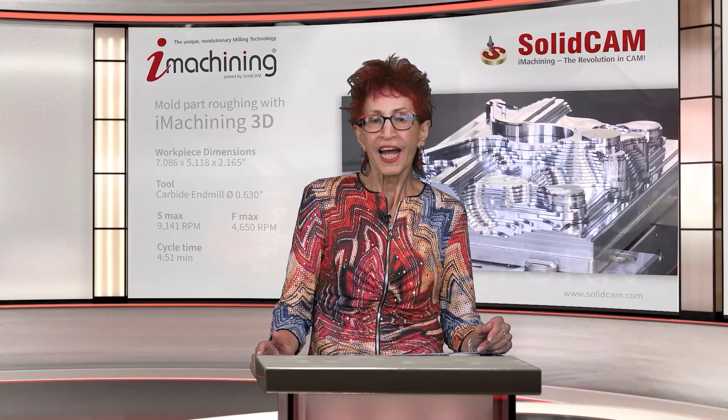Emil, and hi everyone. I can tell you I'm very excited about our 2021 Q4 Summit on October 7, considering that the previous summit in April was very successful with thousands of attendees worldwide. I think I'm beginning to like this virtual world, Emil. People sit in the comfort of their home or office and watch fascinating presentations.

So tell me, Emil, the April summit covered so many topics. What are you going to talk about in this summit? I will tell you the agenda soon. First, I would like to talk shortly about a few subjects. Let's see again the SolidCAM product. It's a complete integrated CAM solution inside SolidWorks and obviously also inside Inventor.

Looking at the center of the circle, we see our 2.5-axis milling module that has been developing for the last 30 years. It's a very powerful module, augmented by our automatic feature recognition and machining module. If you see on the left, you will see our 3D milling modules. First, HSR for roughing, HSM for finishing, and HSS for surface finishing. And we have added recently also our Turbo HSM and Turbo HSR.

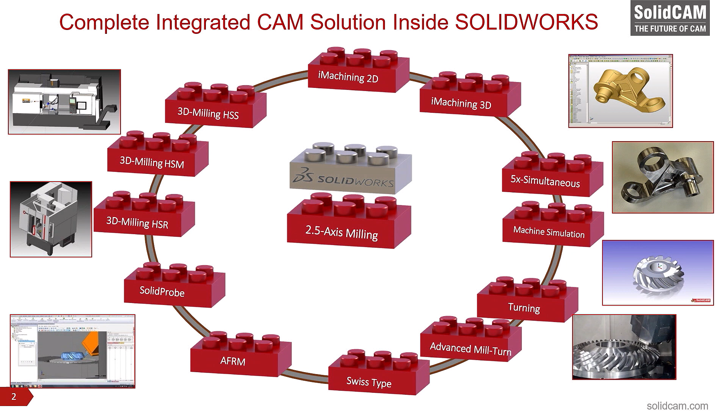Looking at the top, you see our very important two modules, iMachining 2D for prismatic parts, and iMachining 3D for complex surfaces and also for prismatic parts. To the right, you will see our 5-axis simultaneous module, very high functionality. Then we have our turning, our advanced mill turn, and our Swiss type. The last two are becoming our trademark since we are much better than any other product in the world today. And we have also the SolidProbe module for controlling the probes.

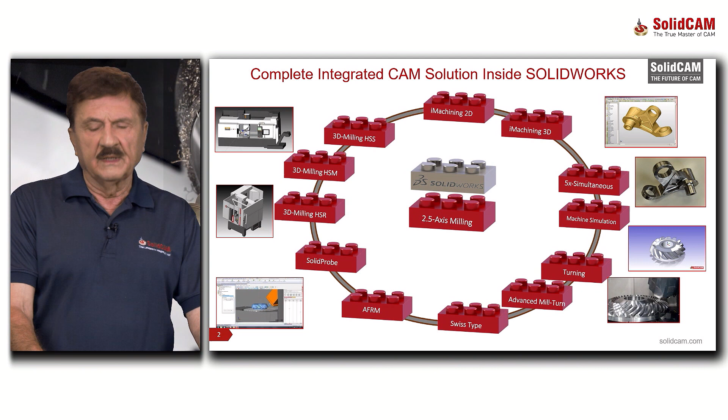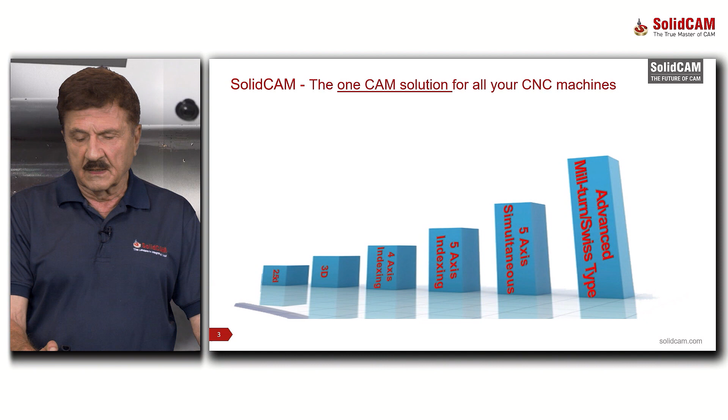So SolidCAM is the one CAM solution for all your CNC machines. It covers 2.5D, 3D, 4-axis indexing, 5-axis indexing, simultaneous 5-axis, and obviously also advanced mill turn and Swiss. As you see, as you go to more and more complex CNC machines, we provide the highest customer value.

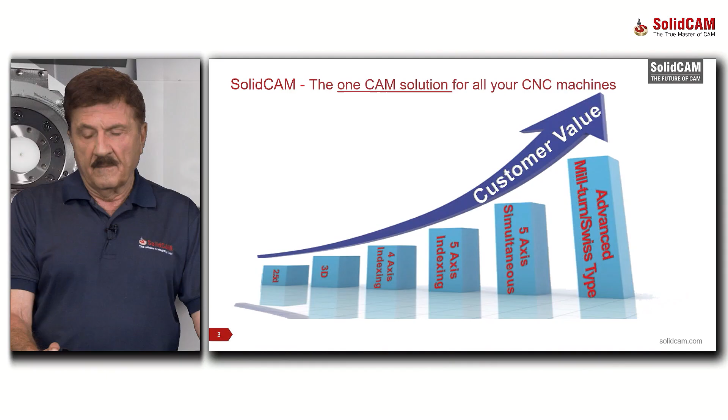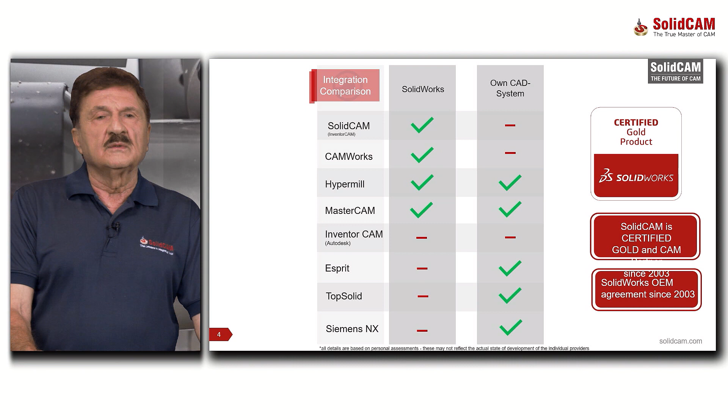So our integration in SolidWorks actually is very important because SolidWorks now is the leading CAD product in the world. And in the machining world, a lot of machine shops already have SolidWorks. They use it for designing jigs and fixtures and some model changes. So we are seamlessly integrated in SolidWorks. So if somebody works with SolidWorks, they can easily learn SolidCAM.

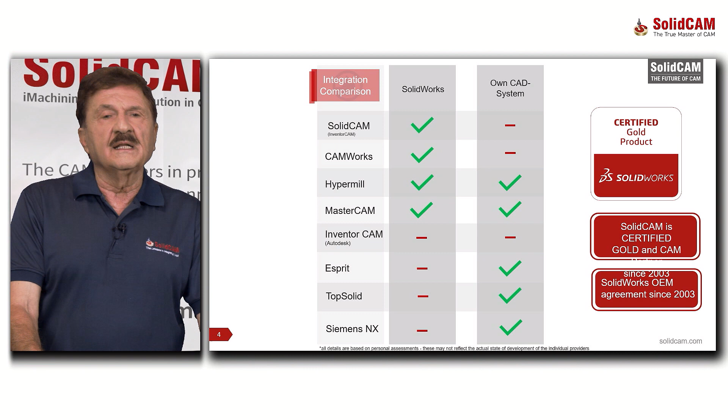There are only two products that are seamlessly integrated in SolidWorks, and they don't have their own CAD. To work with SolidCAM, you need to have either SolidWorks already, or you buy from us the bundle including SolidWorks and SolidCAM. If we look at the third and fourth row, we have Hypermill and Mastercam. These two products, they say they have both: a version with own CAD system and a version integrated in SolidWorks.

But actually, the problem is, since they put most of their R&D emphasis on developing the version with their own CAD system, the SolidWorks integration gets neglected, and in the end has less functionality than the full version with their own CAD, and is also less stable.

So even though Mastercam salespeople sometimes show the simultaneous in SolidWorks, they then concentrate only on showing the version with their own CAD system. And when they sell the product, they convince the customer to work with the version with their own CAD system. Really, we have yet to find any customer happy with Mastercam integration in SolidWorks.

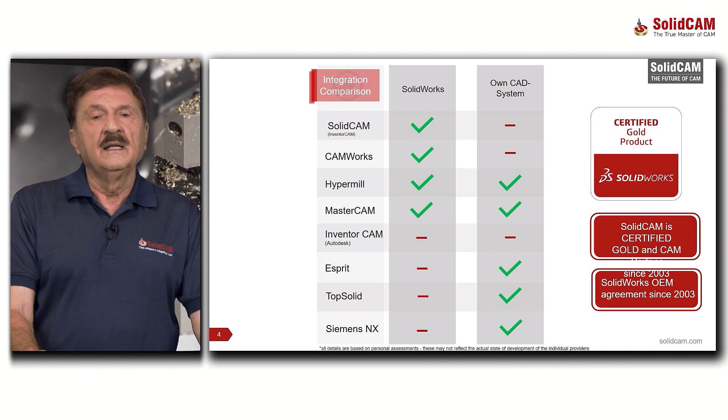If you look at the last three rows, these are the products Esprit, TopSolid, and Siemens NX CAM. And these three products have their own CAD system with no relation to SolidWorks. Now let's look at the SolidCAM company profile. We have 37 years of expertise in CAM development and application with 230 staff.

We have 2 offices in our headquarters. Our European headquarters in Germany has 7 offices, and we have a great international support team in Serbia to support all our resellers worldwide. We have affiliated companies, SolidCAM UK, SolidCAM France, SolidCAM Czech Republic, and SolidCAM Italy. We have a branch in the US, an important branch.

In Asia Pacific, we have SolidCAM India, SolidCAM Japan, SolidCAM China, and affiliated companies, SolidCAM Australia, New Zealand, SolidCAM Singapore, and SolidCAM Taiwan. In addition to all these branches and affiliates, we have a worldwide CAM distributor network of 65 major resellers. So today, worldwide, we have 22,000 industrial seats of SolidCAM and 55,000 educational seats.

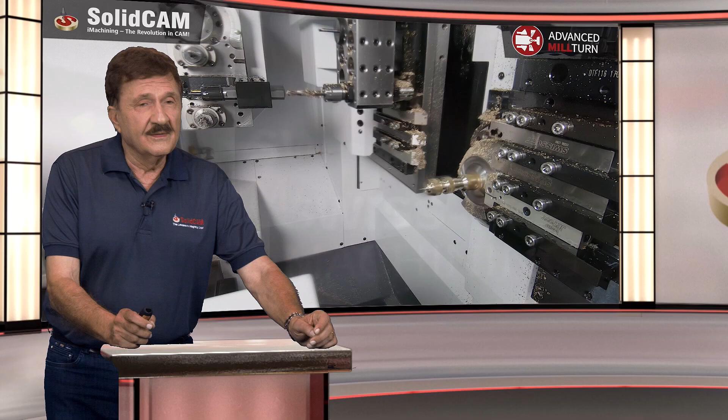Well, the truth is, everything is unique about iMachining. First of all, we are the only technology of its type that has both iMachining 2D for prismatic parts and iMachining 3D for complex surface parts and also for prismatic parts.

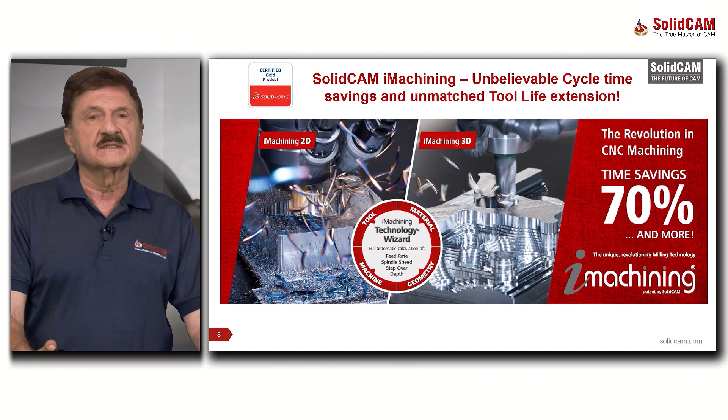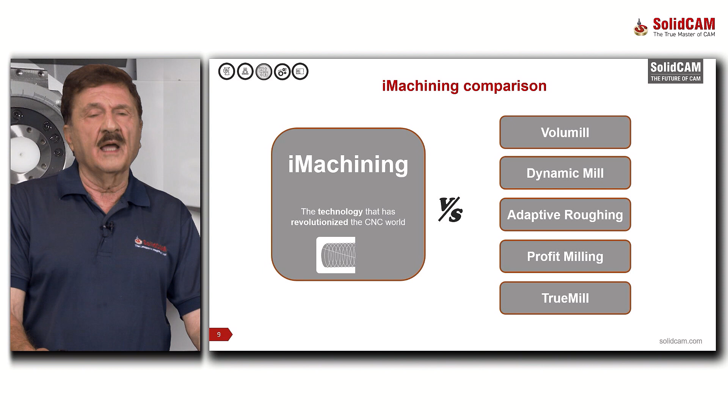So now, let's really look at a close comparison of iMachining against its competitors. You see on the right, first, VoluMill. This is a module that is integrated in many CAM systems today, like in Hypermill, Cimatron, GibbsCAM, and many others. We have Dynamic Mill of Mastercam. We have Adaptive Roughing of NX CAM. We have ProfitMilling of Esprit and TrueMill of SurfCAM.

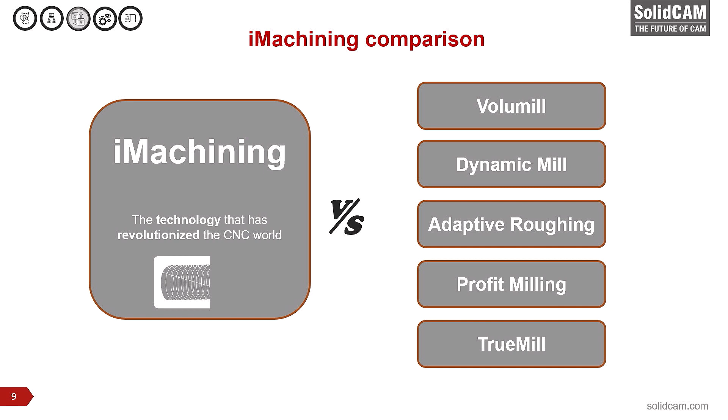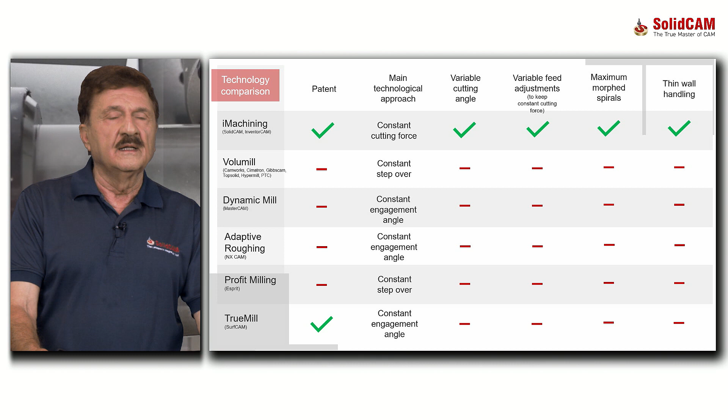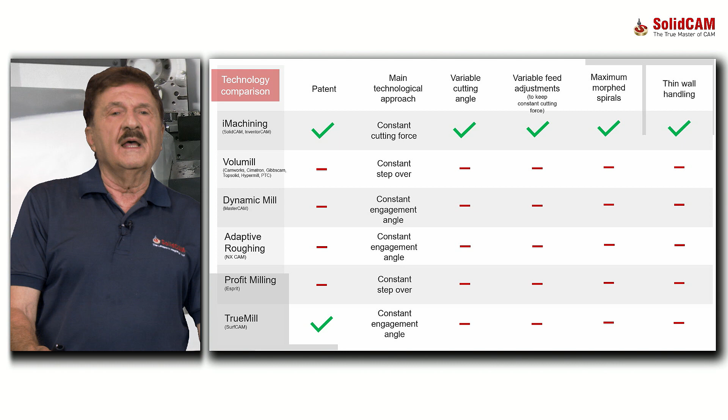OK, let's look now deeply and try to see why iMachining is so unique. First of all, you see in the first column regarding patents, we have several patents for iMachining 2D and 3D. No other one has patents except TrueMill of SurfCAM, and you know what's the situation of SurfCAM today. Next, we go to our main technological approach. This is a major, major advantage of iMachining.

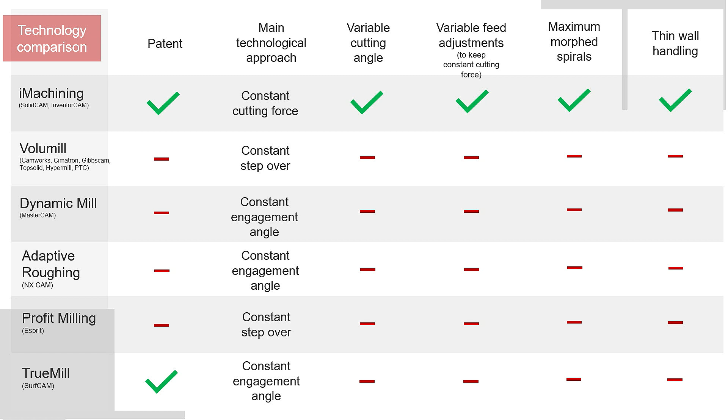We guarantee constant cutting force on the tool all along the tool path and also constant spindle load. Actually, if you look at the spindle load of the CNC machine while cutting with iMachining, you'll always see a constant load of about 17, 18% on the spindle. Our competitors have a much inferior technological approach, either constant step over or constant engagement angle.

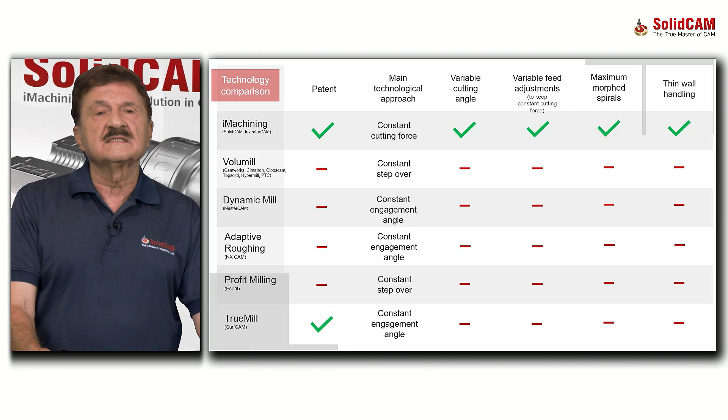Next, we see that iMachining is the only one that has variable cutting angle all along the tool path. All the competitors don't have it. Also, iMachining has variable feed adjustment all along the tool path to maintain the constant force on the cutting tool.

Next, the column before the last: morphed spirals are the most optimal tool path in terms of speed. And iMachining has maximum morphed spirals. The other technologies have some morphed spirals, but iMachining is the only one with maximum morphed spirals and some trochoidal tool path.

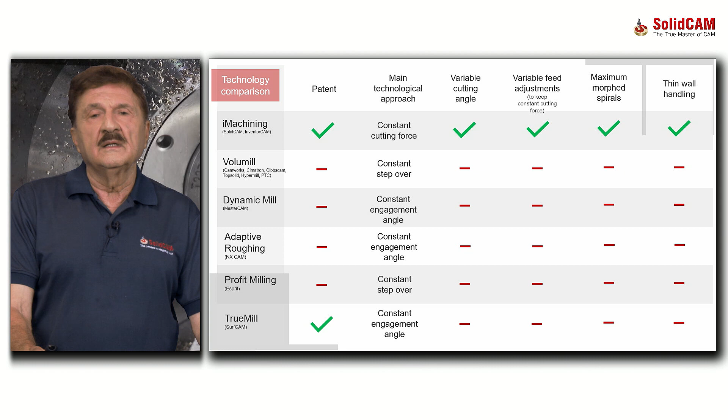Next, we look at the last column, thin wall handling. This is a very important point. Many times when you are machining a piece, you get a thin wall. And if you take it the wrong way, you could ruin the part. iMachining has special handling for thin walls that will not cause any damage to the part. Let's see more of our advantages.

Now we have come to the greatest advantage of iMachining, our Technology Wizard. You see, because our toolpath can keep constant force on the cutting tool, the Technology Wizard is able to automatically calculate optimal feeds and speeds for every point of the toolpath, again keeping the constant force on the tool, and it can do it for all types of materials we cut, different cutting tool types, and different CNC machine parameters.

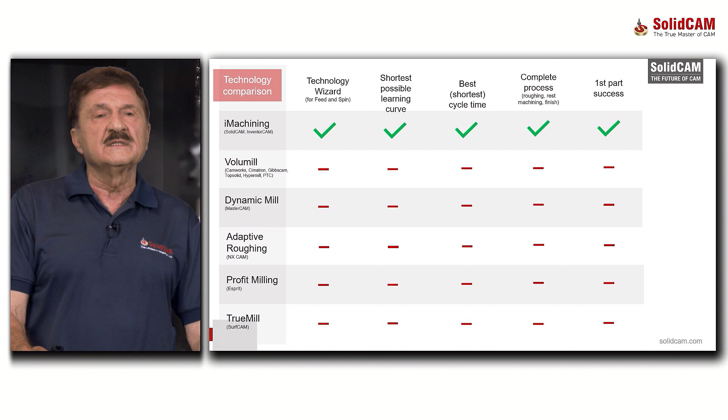None of our competitors that you see, VoluMill, Dynamic Mill, Adaptive Roughing, ProfitMilling, TrueMill, have any wizard that approaches our wizard. And if somebody tells you they have the same technology as iMachining, ask them, show us your wizard.

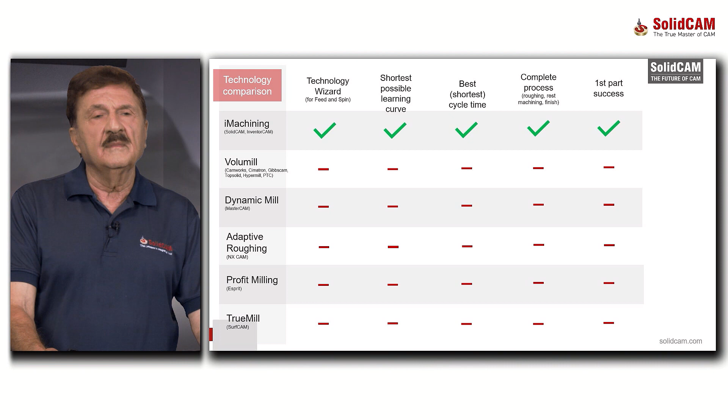So as a result of all the advantages I mentioned till now, iMachining has the best, shortest cycle time. We have made a lot of benchmarks competing against VoluMill, against Dynamic Mill of Mastercam, against Adaptive Roughing of NX CAM, against ProfitMilling of Esprit, and we always had the shortest cycle time by a big amount.

The next column, the one before the last, complete process. iMachining is the only such technology that gives a complete process, roughing, rest machining, and finishing for 2.5D prismatic parts. And the combination of all the advantages I talked about till now guarantees first part success, which is very important for CNC machinists.

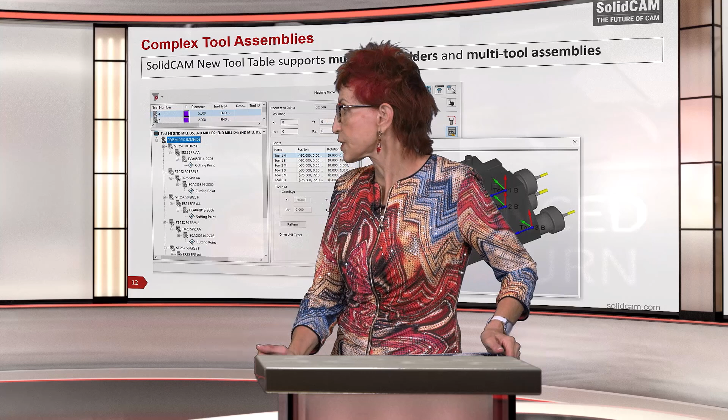You know, since SolidCAM 2021 was released, all our customers want to update to this latest version. Can you tell me some of its highlights? Can you share with us? Yes, SolidCAM 2021 is our latest and greatest version.

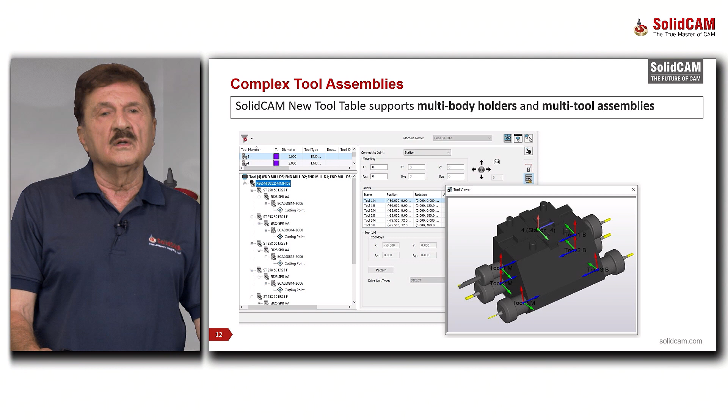We have worked on it for many years, and it has a lot of new functionality. For example, we have a completely new tool table that supports complex tool assemblies and also multi-body holders. You see here in the picture an example of such complex tool assembly. And this is important for mill turn and Swiss type machines.

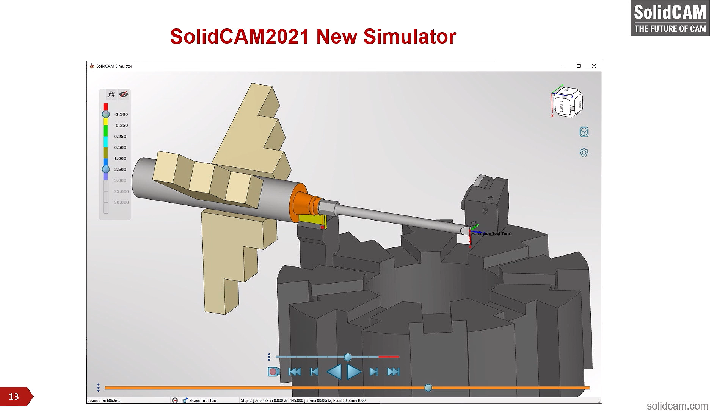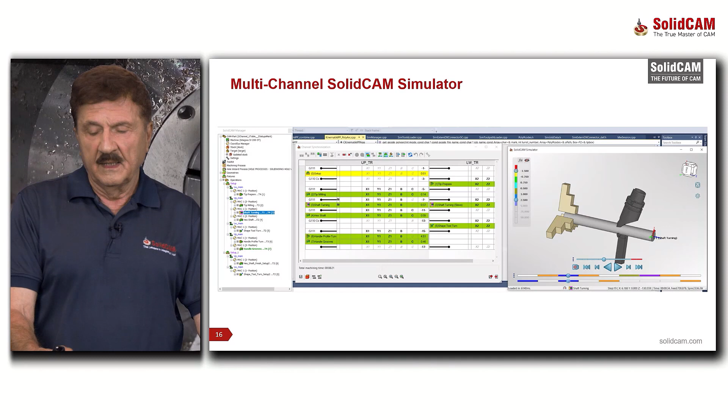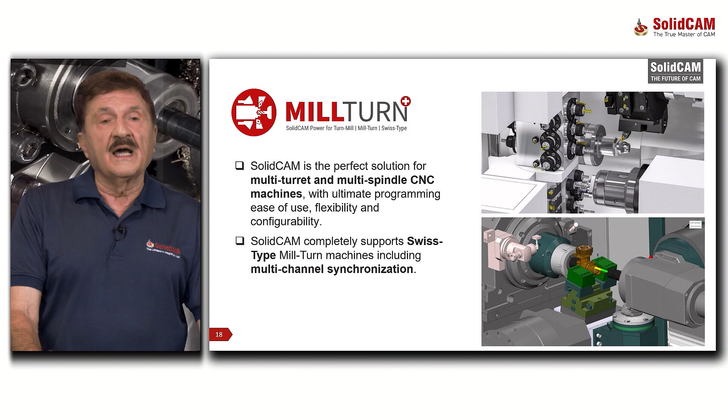Let me review quickly the SolidCAM innovation process in the last 10 years. We had SolidWorks integration, obviously also Inventor integration. We developed HSM and HSS, our 5-axis functionality, the great iMachining, 2D and 3D, and lately, in the last few years, our mill turn and Swiss type solution. Now, SolidCAM is the perfect solution for multi-turret and multi-spindle CNC machines. Also, SolidCAM completely supports Swiss type mill turn machines, including multi-channel synchronization.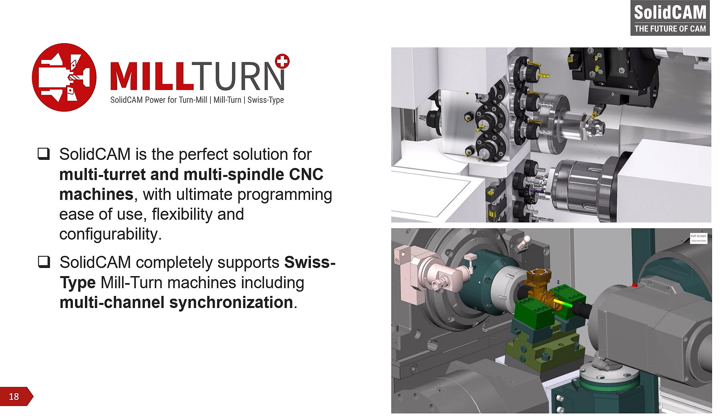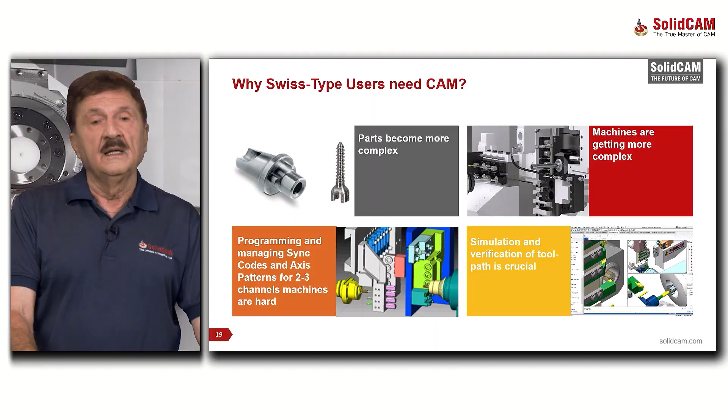Let me talk a little more about the Swiss type solution, because these Swiss type machines are becoming more and more prevalent at our customers. Parts for Swiss type machines have become more complex, and the machines are also getting more complex. Programming and managing synchronization codes and axis patterns for multiple channel machines is hard. And very important, you need simulation and verification of the toolpath. It's very critical.

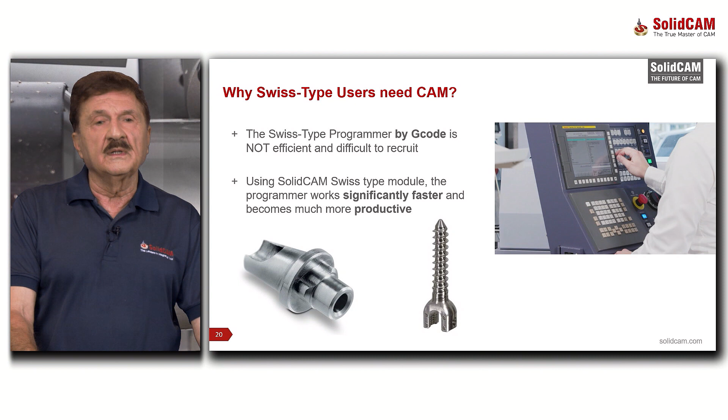Many of our customers who get Swiss type machines try in the beginning to program them with G-code without a CAM system. But actually, a Swiss type programmer using G-code is not efficient at all, and it's also very difficult to find such a person. Using the SolidCAM Swiss type module, the programmer works significantly faster and becomes much more productive. SolidCAM supports all the functions of Swiss type machines, including virtual machine ID, machine control operation, machine preview, channel synchronization, machine simulation, and patterns.

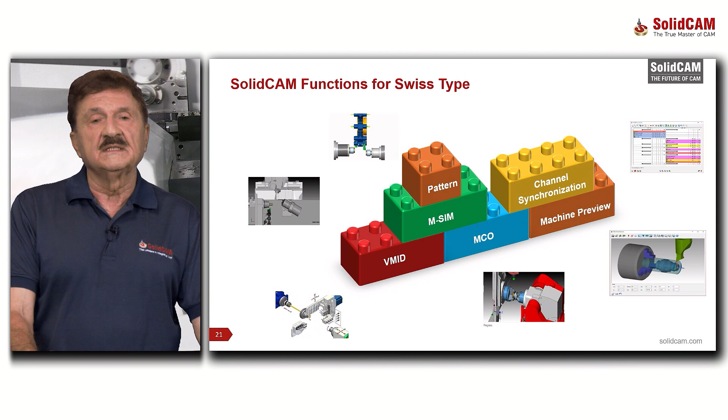Okay, now I'm talking to you SolidCAM resellers and staff. To be number one in Swiss support, you need to either hire a Swiss CNC expert or let your technical people join the advanced mill turn, kinematics, and Swiss type post training that we are giving worldwide. We have given it already to about 50 of our technical staff at our resellers, and I recommend all our resellers make sure their technical people go to this training. It's a specialized training called task-based training, based on giving tasks with videos, and the answers are also given through a video. A very easy way to take it in parallel to your regular work.

When you find prospects that have Swiss CNCs, this could be completely new customers who don't have SolidCAM, or a customer that has SolidCAM only for milling and turning and doesn't have the solution for Swiss type. So you can use a post-processor from our database, or you have to customize some existing posts, and you have to train them on this solution.

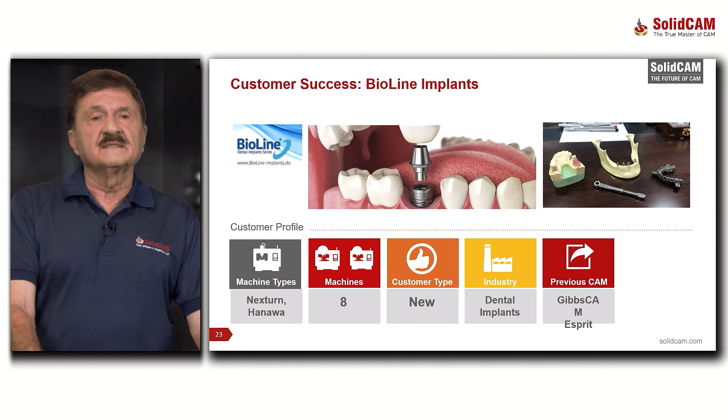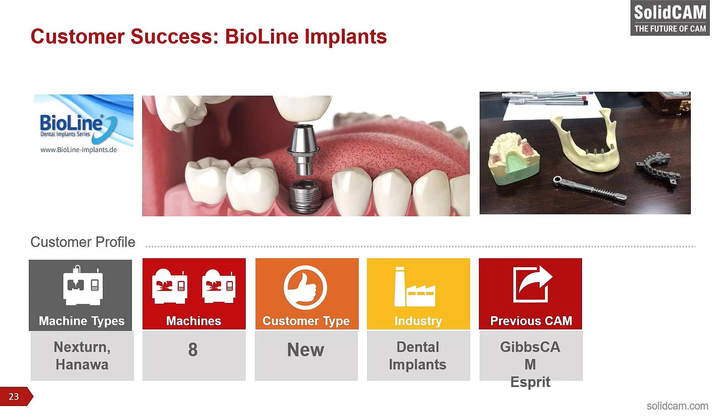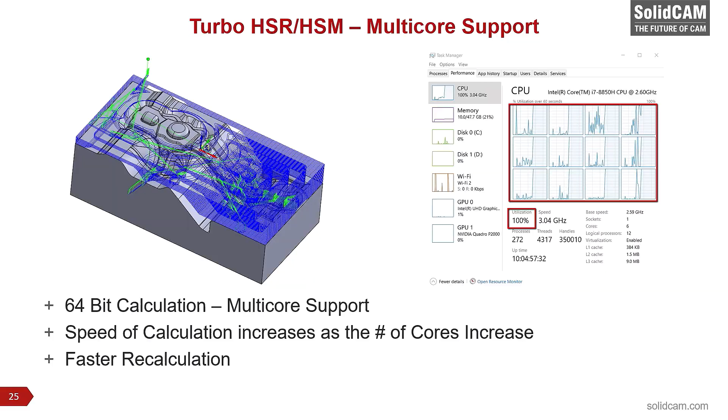Another important new feature in SolidCAM 2021 is our Turbo HSR HSM. It has 64-bit calculation and multi-core support, so the speed of calculation increases as the number of cores increases, and it also has much faster recalculation. Also, we have added many new features to our SolidCAM simultaneous 5-axis offering, including edge breaking, edge trimming, and auto 3+2 roughing.

You know, Emil, you have been talking about the advantages of SolidCAM over Mastercam. And we all recently heard about the acquisition of Mastercam by Sandvik. What is your opinion on that? Actually and truly, I saw it coming. Mastercam have been asleep at the wheel the last couple of years regarding their R&D development, and they were worried about their future. You see what happened in the last 10 years, many CAM companies have been acquired by bigger conglomerates.

Now, what happens when a small CAM company is acquired by a bigger conglomerate? Many times they lose some of their key staff who cannot manage in the new environment. Also, they become less focused on their customer requests as opposed to their conglomerate financing issues.

For example, Hexagon has acquired 10 CAM products. Now they have a major problem: which of these products are they going to develop further and support well? They have to choose. So the products they choose not to develop further get frozen and wither away, and this is a bigger problem for customers who have these products.

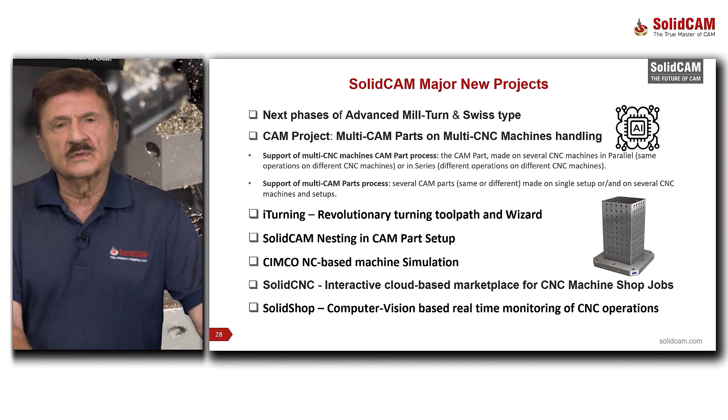Can you give us a sneak peek into the projects that SolidCAM is working on today? I see that our R&D and product management are working around the clock, and we have expanded our software programming team worldwide. Sounds like SolidCAM is coming with something new every few months. Everyone in SolidCAM is fired up. Yes, definitely. We have many new projects that we are developing this year and next year. I will give a short overview of these major new projects.

First, we are developing the next phases of advanced mill turn and Swiss type solutions. We are the best in this area, and we want to stay far ahead of all our competitors.

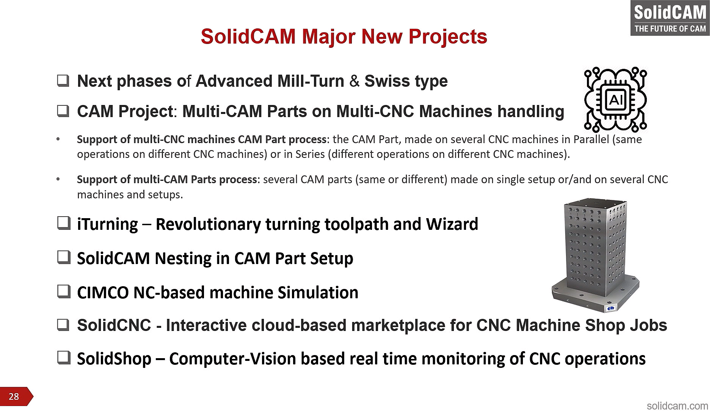Another important development is our new CAM Project. As opposed to the CAM Part that you know till today, CAM Project will be able to handle multi-CAM parts on multi-CNC machines, will support multi-CNC machines with a single CAM part process, and will also support multi-CAM parts on the same machine or on several machines.

Another major project is iTurning. You know that iMachining provides revolutionary technologies for milling. So we have been working for some time now, developing our revolutionary turning toolpath and wizard. By having both iMachining for milling and iTurning for turning, for mill turn machines, we get the double benefit of both these technologies in reducing cycle time and increasing tool life.

For requests from our resellers and customers, we are adding SolidCAM nesting in CAM Part setup.

Next, we know we have integrated CIMCO Edit Professional in our current versions. They are developing NC-based machine simulation. We are doing beta testing of this product. It will be available in a couple of months.

Next come two very innovative products that we are developing. First, Solid CNC. This is an interactive, cloud-based marketplace for CNC machine shop jobs. All our SolidCAM customers who are on subscription and with iMachining can put their data about their machine shop and their machines and the type of work they do on this Solid CNC marketplace. People looking for companies to give their machining jobs to could find them there and make contact to give the work to them.

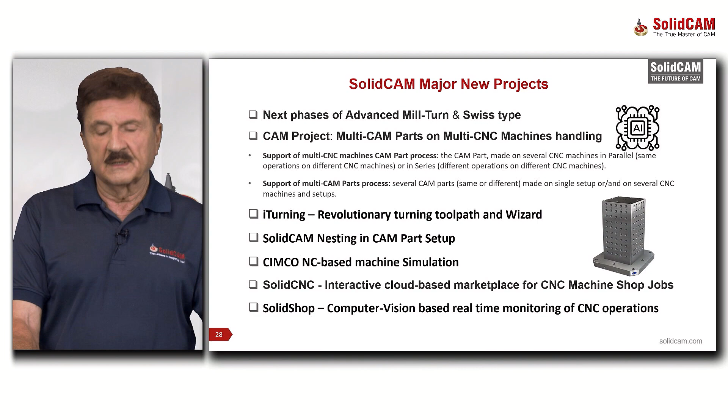Wow, you have really found a way to enhance our customers' businesses. Okay, let me re-emphasize a few points here. For a SolidCAM customer to be able to join the Solid CNC marketplace, he must be on valid subscription and have iMachining. This will guarantee that the job givers get the best offer.

As I understand, we will do extensive marketing for the Solid CNC web marketplace to achieve maximum exposure to CNC job givers. Most definitely. It's so important for us that all our customers get our latest version and get iMachining.

So we are giving this additional benefit to customers who have our latest version and also iMachining. What we are doing now is a campaign that we started in Q3 and continuing in Q4 2021 till the end of the year, to make it attractive for customers not on subscription to come back on subscription.

For this campaign, there will be no reinstatement fee for SolidCAM. A customer who renews his subscription gets our new shop floor simulator seat for free, and also gets CIMCO Edit Professional for free. In addition, if he decides to upgrade to new modules for an existing license, he will get 15% off on these additional modules. A really attractive campaign. Make sure to use it to get our latest version and enjoy it.